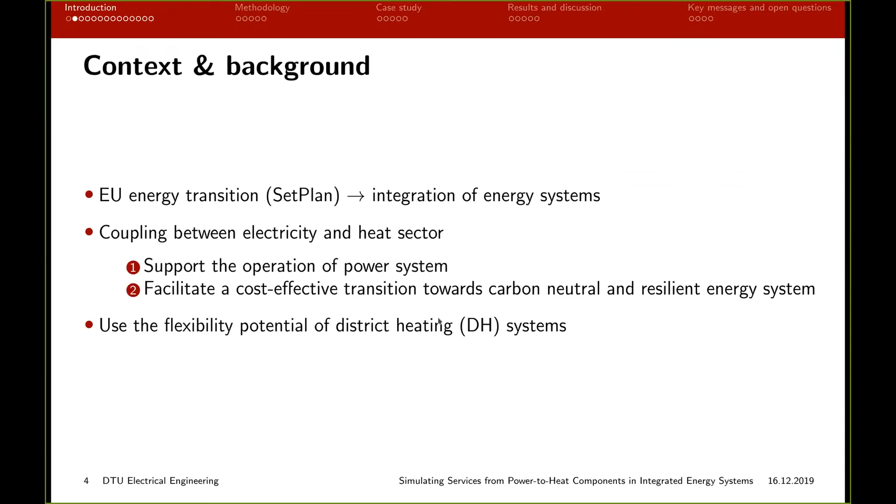So traditional power systems have been very centralized, vertically integrated, very few actors, and as we all know, they are evolving to complex structures. So in Denmark, in the context of this study, for instance, we have a strong penetration of wind power in the power system, large-scale PV, many actors coming into play, like several DSOs, and also proliferation of distributed energy resources that are also calling for new actors such as aggregators.

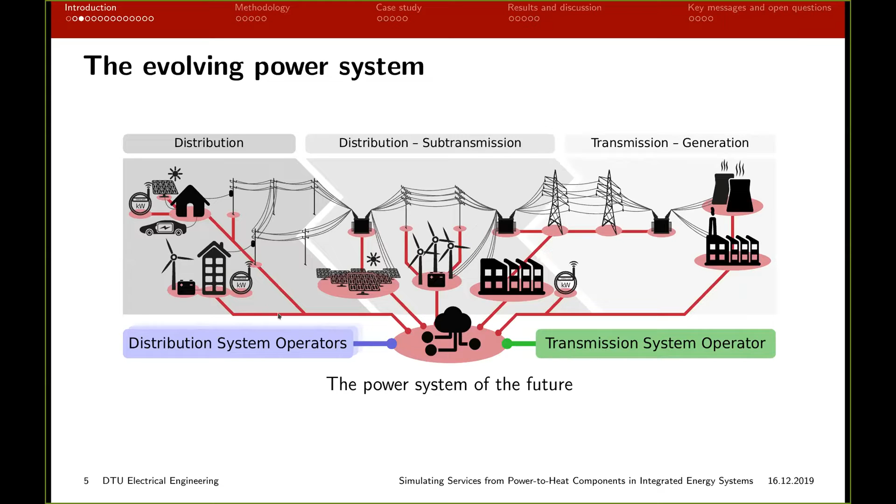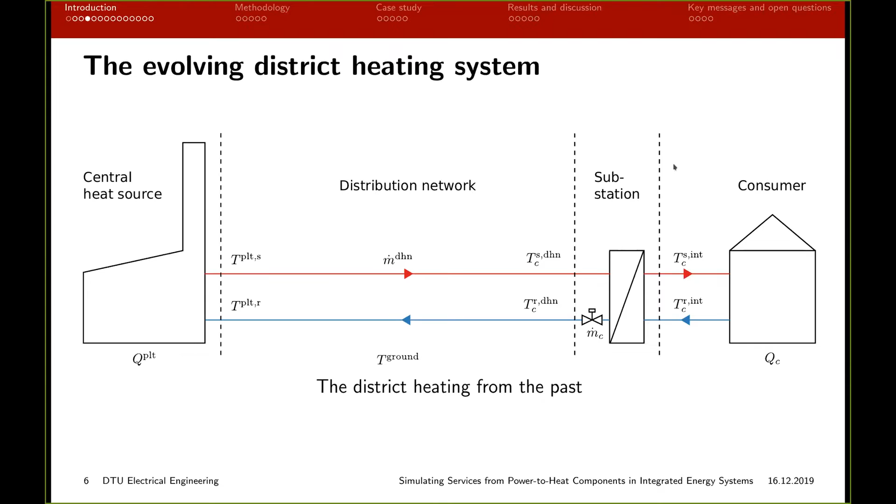On the other hand, we have district heating systems which have been traditionally operated with a central heat source that is delivering heat to end consumers via a network of distribution pipes carrying hot water to substations where the heat is exchanged to the consumers. And these systems have evolved through several generations. So from the first generation based on steam with very high operating temperatures above 200 degrees, to the second generation where pressurized hot water systems came into play, which drastically decreased the temperatures.

Still, the energy mix was very singular with only CHPs. And now Denmark is at a well-established third generation with temperature levels below 100 degrees, a fairly diversified energy mix with large-scale solar coming into play, and CHP, biomass. And there is a strong evolution towards the so-called fourth generation.

Thibaut, sorry to interrupt you. Can you speak a little bit louder? Apparently, you're not being heard very well. If you could just speak a bit louder, that would be great. Thank you. Is it better now? Much better. Thank you. Okay, sorry.

Yeah, so these systems are evolving towards the so-called fourth generation district heating networks, where the energy mix is much more diversified, mainly through heat recovery from data centers or industrial processes, a strong focus on multi-timescale storage from seasonal to weekly to daily, and a strong coupling to the electrical grid with centralized heat pumps and decentralized heat pumps.

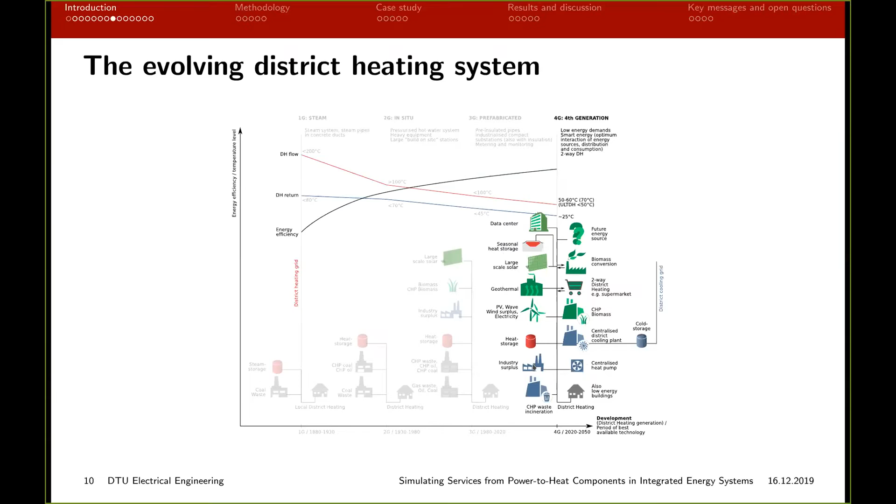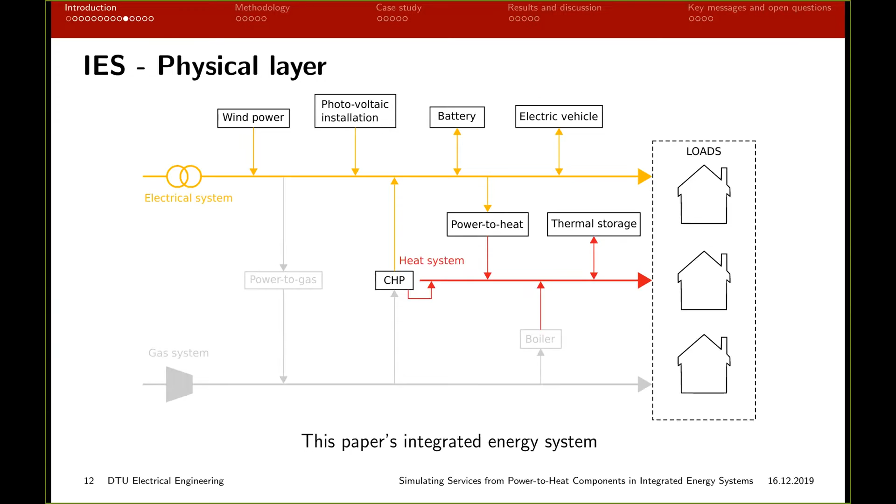So physically speaking, integrated energy systems look like this, and in this paper we focus on electrical and heat systems only, where both infrastructures deliver energy to the loads, and we have coupling technologies such as power to heat units that convert electricity into heat. These systems have actually undergone individual digitalization. So in the electrical system we see the well-known smart grid concept, and the equivalent of this heavy digitalization would be the 4GDH in district heating.

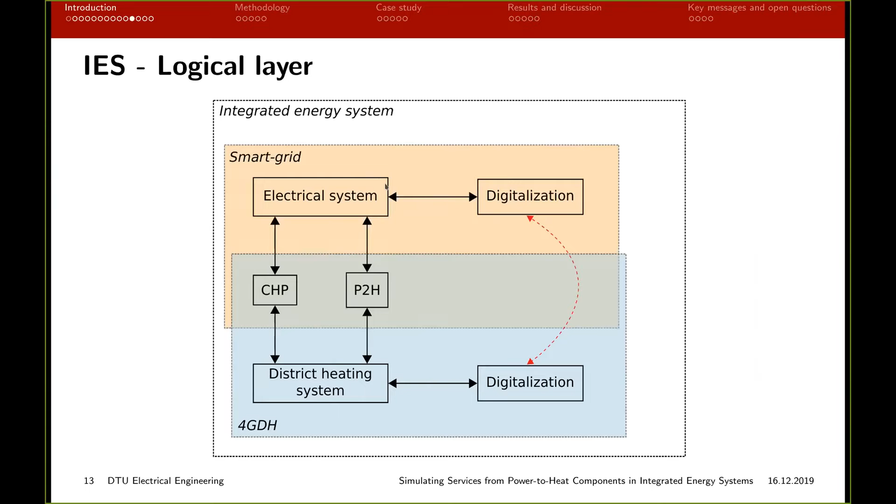And taken together with the physical coupling, they represent the integrated energy system that we are talking about today. And what is special about these is that electrical systems are fast, so they have operational timescales in the order of seconds or below, and they are very geographically spread from transnational to national to very localized systems, and their control is usually complex with several layers and entities involved.

On the other hand, district heating systems are very different, so it's hot water flowing into pipes, so these systems are slow moving, with the operational timescale in the order of minutes to hours. They are localized, so there is no such thing as a transnational district heating network. And their control is fairly simple with few entities involved and few layers of control.

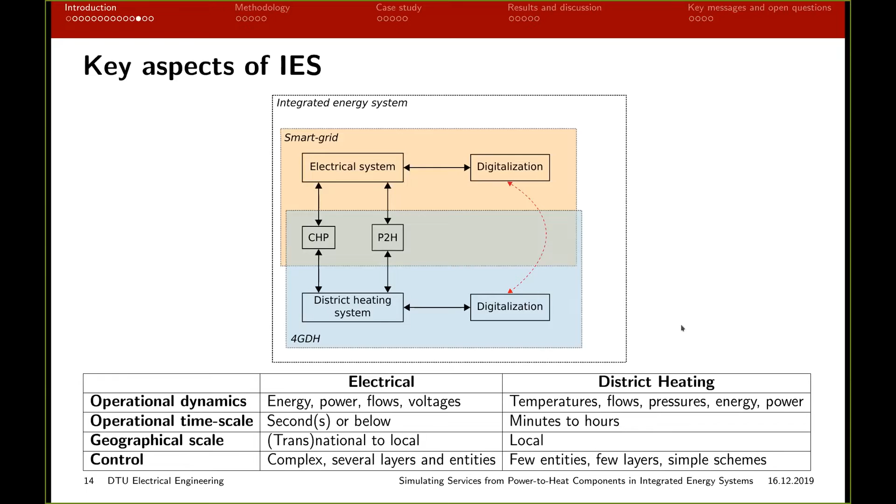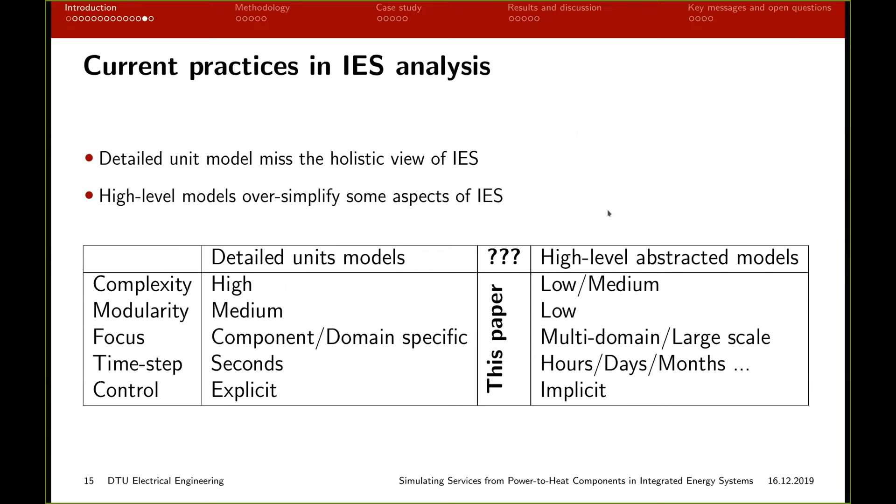So current practices in modeling these integrated energy systems are either focusing on a very detailed unit model that are highly complex and usually abstract to a very high degree the rest of the system in which the unit model is deployed, or very high-level abstracted models such as Balmorel or EnergyPLAN, which are low to medium complex and also abstract part of the system and oversimplify some of the system.

So with this paper, we actually tried to develop a complete tool chain for simulating integrated energy systems, and more specifically the dynamic operation of power-to-heat units in such context. We also tried to look at characterizing the effect of neglecting dynamic modeling of the thermal delays in district heating networks, and finally looked into the trade-off between computation time and simulation outcome accuracy within the dynamic simulation of district heating network.

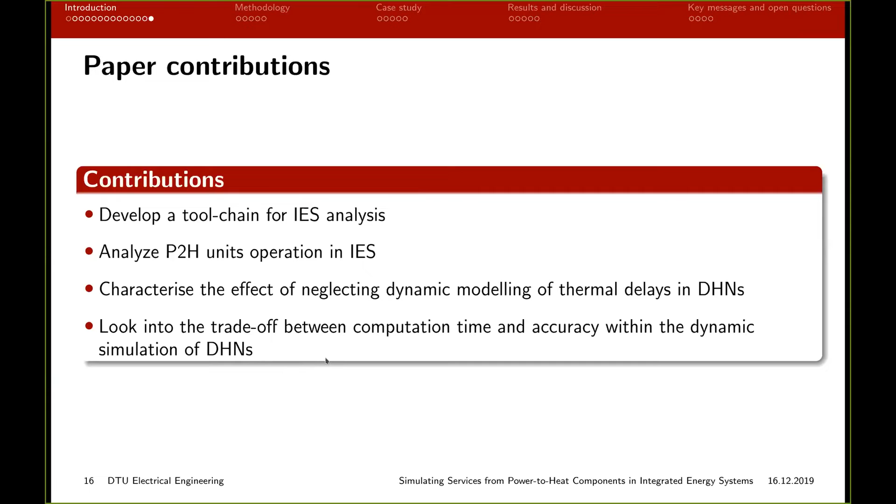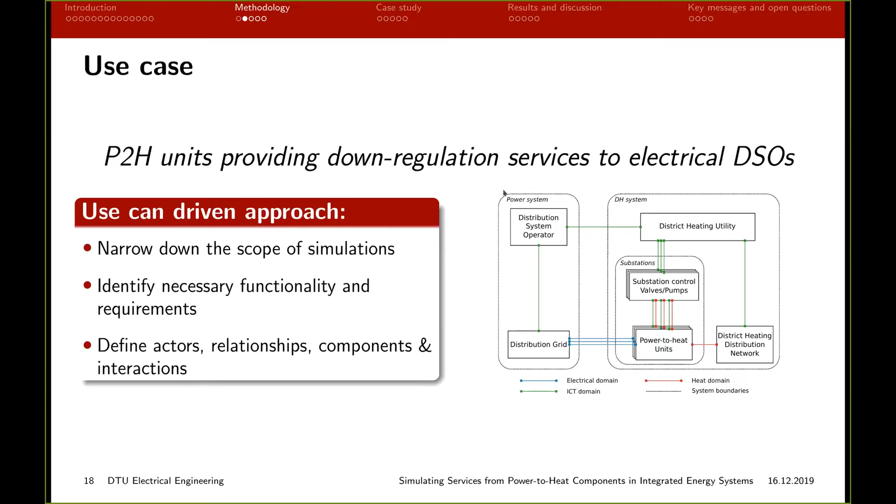So to do that, we actually developed a co-simulation toolchain using MOSAIK, which is a flexible smart grid co-simulation framework, which basically allows you to create an entire ecosystem of several simulators that are addressing a common problem and communicating and orchestrated together through MOSAIK. So we've built a power system simulator in Python using PandaPower. The control domain has been modeled explicitly in Python as well as the cross-domain units, so namely the power-to-heat units.

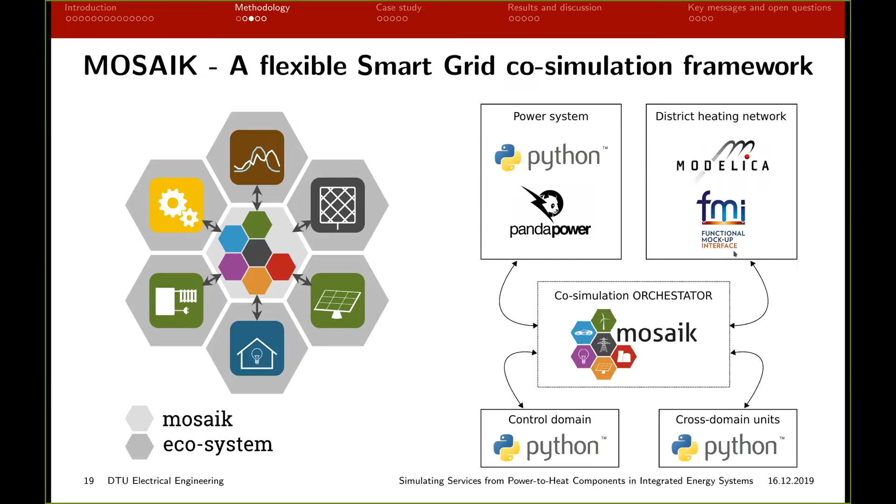District heating network model was programmed in Modelica, more specifically in the Dymola modeling environment, and interfaced with MOSAIK through the functional mockup interface. So basically, the district heating network model was packed together with its solver into an FMU, which is a functional mockup unit. And we have built a district heating interface wrapper around the FMI++ library in Python, which is basically a facilitator to interact with FMUs at simulation runtime in order to interface it with the MOSAIK scenario.

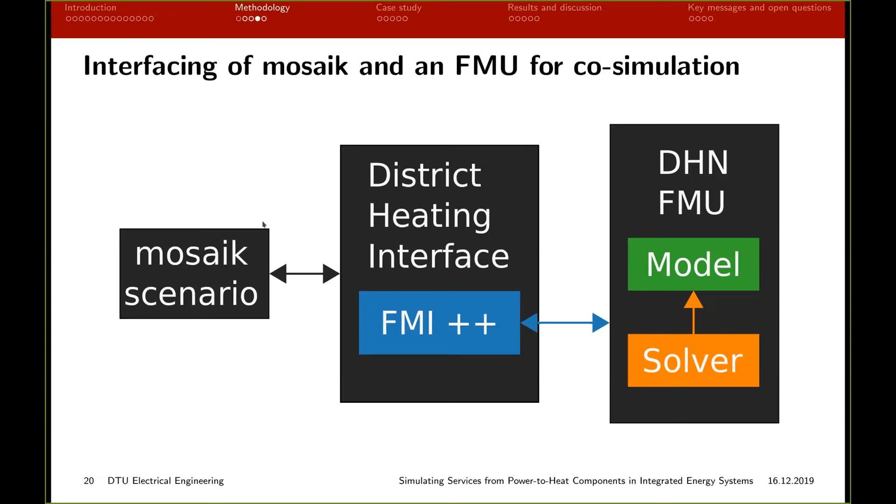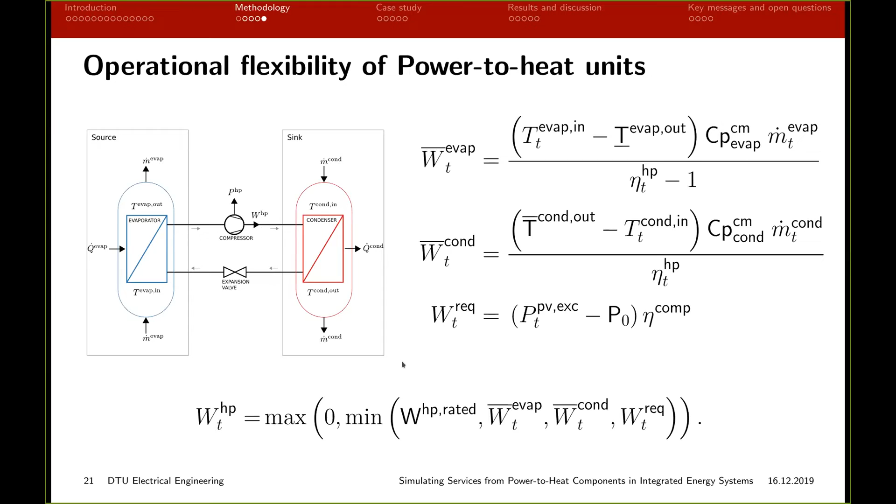The power-to-heat unit considered here is a heat pump, a single-stage vapor compression heat pump that has been custom-tuned to include some thermal constraints arising from the integration of the heat pump into a thermal system. And these constraints are to bound the work that can be provided by the compressor of the heat pump. So there is a lower temperature limit at the cold side, the evaporator, because you don't want to freeze the water that you're cooling down, and an upper temperature limit on the hot side, namely the condenser, because you don't want to start boiling the water that you're heating up. And the work that the heat pump can then provide is bound by these thermal limits, as well as the rated work of the compressor.

So our use case has been applied to an existing case study using our co-simulation toolchain in Nordhavn. It's a district in Copenhagen, Denmark. This area features both an electrical and district heating network, and we've performed low temperature district heating simulations with supply around 65 degrees, return 35 degrees, using the real topological and time series data that have been provided by the respective local DSOs for a simulation horizon of 24 hours.

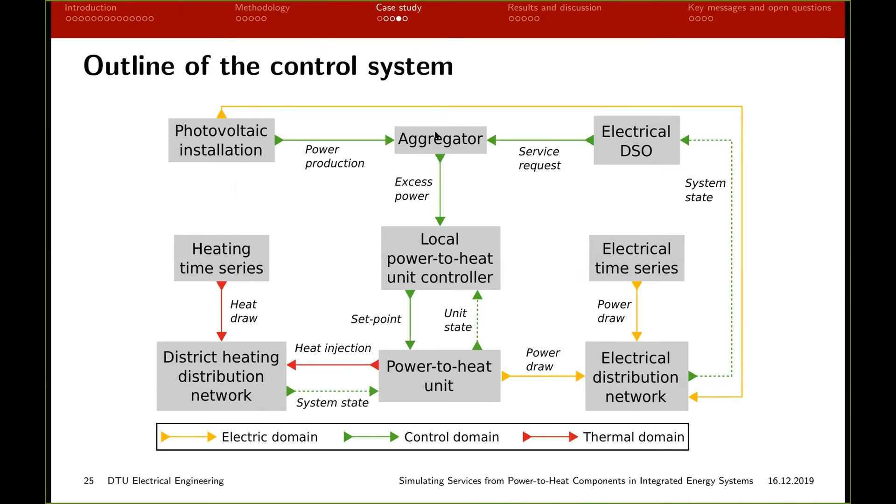Several simulation scenarios have been considered. So a base case with no heat pump using all the real heat demand signal, and same for the electrical side. A step activation of the heat pump to isolate its effect using some flat heat demands, and a peak shaving scenario where the heat pump was requested to convert some excess electricity into heat.

We've also compared dynamic versus quasi-static district heating network simulation, performing also a sensitivity analysis on the co-simulation time step. So this is basically the simulation time step at which the orchestrator, MOSAIK, is interacting with the different simulators to exchange data among themselves. And this has been done for a 143 kilowatt electrical heat pump.

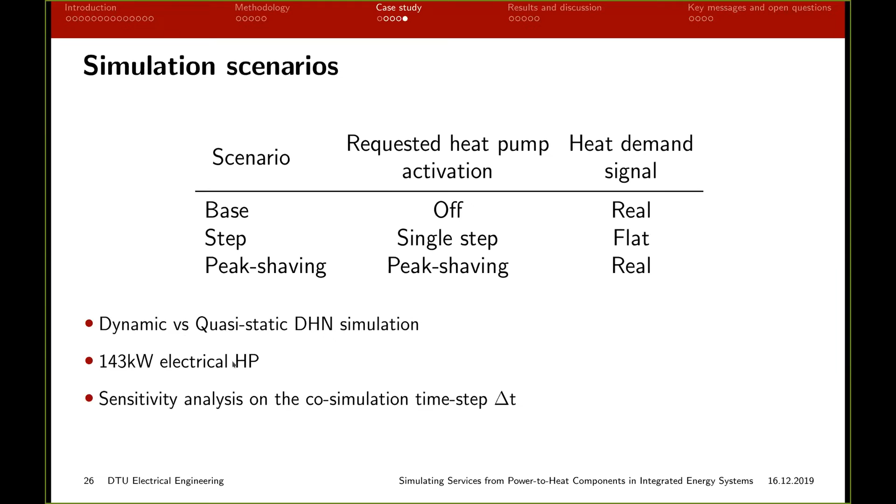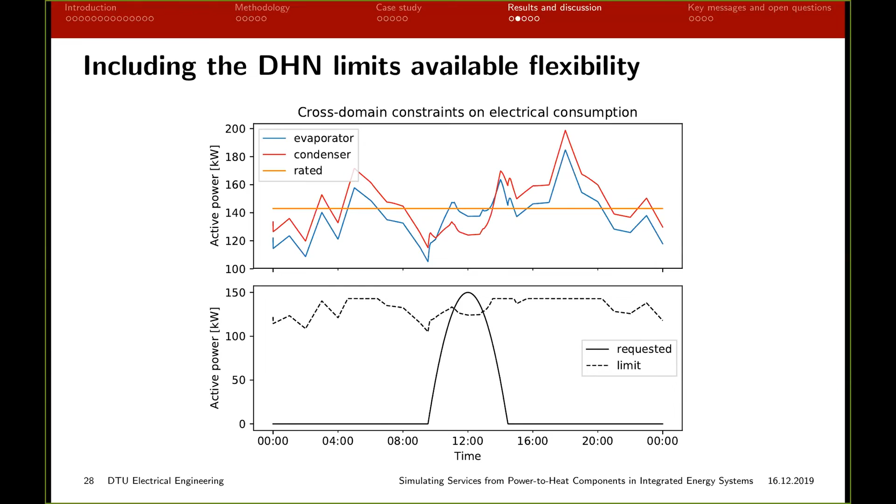Second comparison here: we've shown that the maximum electrical consumption of the heat pump varies over time, and to isolate that effect, we checked on a step activation of the heat pump and constant operation in the district heating network. We can see that at a step activation at noon, there is a spike in the thermal constraints that gradually decrease in steps after 20 minutes. These are the solid lines. This is under a dynamic simulation, and under a quasi-static simulation, we see that there is actually no gradual decrease. So we don't capture these dynamics occurring after the step change.

And to understand these gradual effects, we have to look at what's happening at the heat pump level. We can see that after the step activation, there is also a transient in the heat that is absorbed at the evaporator and released at the condenser, as well as in the COP, that is decreasing. That is because as the heat pump starts operating, it is working over a larger delta T because the return water is being cooled down and the forward water is being heated up.

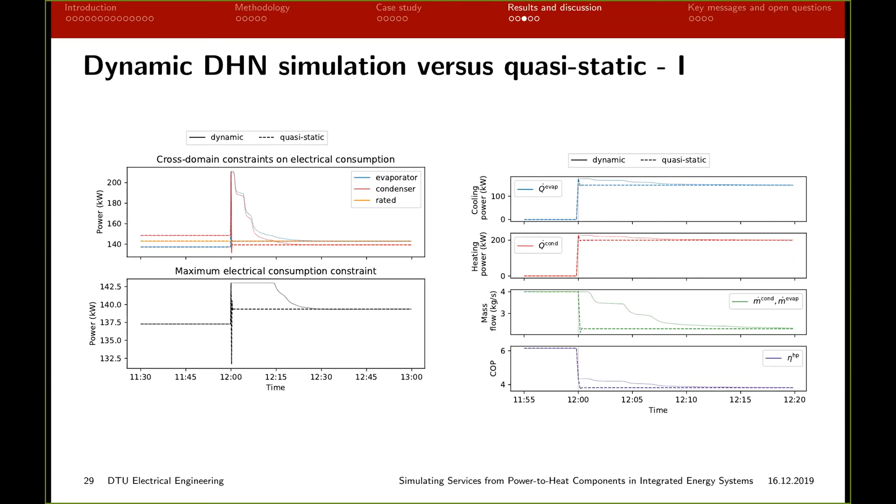But we can also see that there is an effect on the mass flow that the heat pump is undergoing in the district heating. So that means that the heat pump activation actually affects the mass flow in the district heating network. And to understand that, we have to look at what is happening in the district heating network.

So here is an overview of the district heating network consumers that are hydraulically located downstream of the heat pump. We can see that after the step activation, the consumers that are closest to the heat pump see hot water coming in first. And as the hot water is reaching them, they start to close their valve to meet the desired constant return temperature that they are asked to deliver back into the system.

And actually these steps are each of the consumers that is seeing the increased temperature resulting from the step activation of the heat pump. So they close their valve one after the other, which explains the different steps that are propagated upstream at the heat pump level. And again, under a quasi-static simulation, these steps are actually not properly perceived by the simulation.

So this is actually important because a quasi-static simulation doesn't capture the delays and transients that are induced by the travel time of water, and therefore the dynamics and heat pump flexibility cannot be properly evaluated.

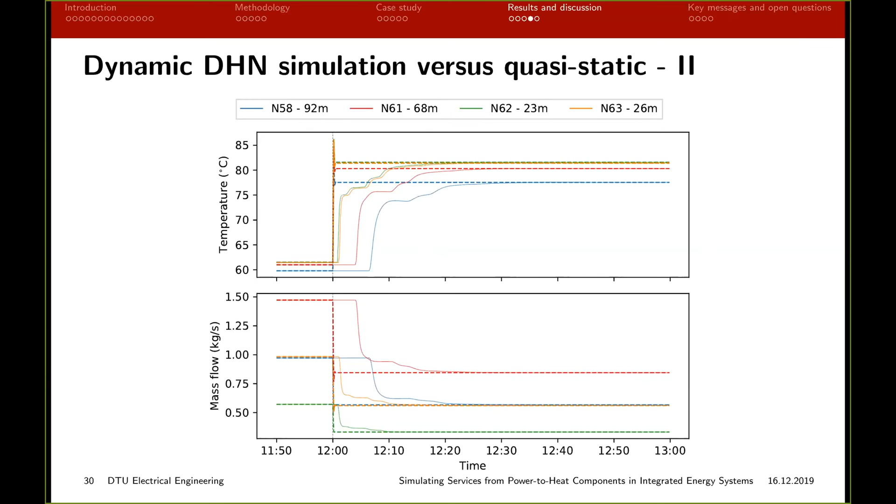Finally, we looked into some computational accuracy and trade-off. So here, the first trade-off is between the dynamic and quasi-static simulation. So we can see a quasi-static simulation always introduces some error, both for the critical node supply temperature in the district heating network, and also an electrical dynamic, which is the maximum power limit for the heat pump. On the other hand, a dynamic simulation actually is very accurate up to 120 seconds, so 2 minutes time steps. And after that, the error increases largely to reach over 15% for a simulation time step of 0.5 hours, for instance.

Then the idea was to check whether there was an actual trade-off for the co-simulation time step within the dynamic simulation. And here is a sensitivity analysis for different co-simulation time steps: 1 hour, 15 minutes, 10 minutes, 5 minutes, and 10 seconds, which we consider to be the most accurate and the absolute truth. And you can see here there seems to be a Pareto front at delta t of 5 minutes, where the error and computation time stay reasonably low.

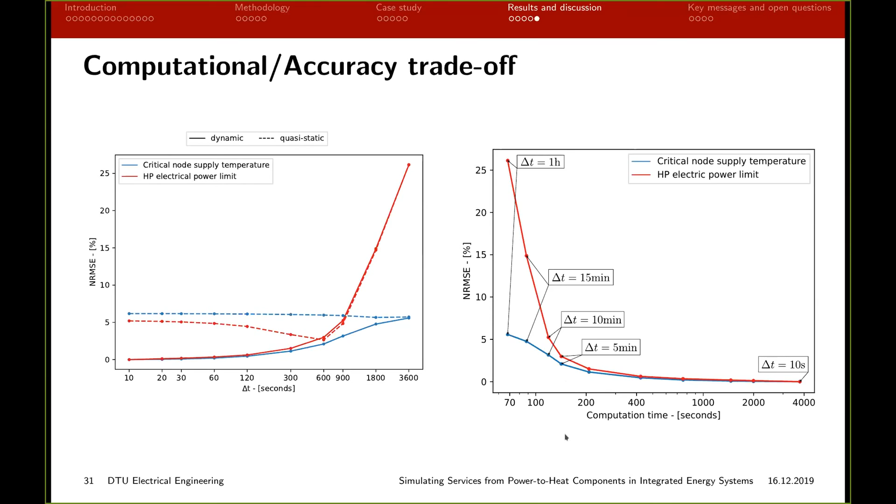So in conclusion, we actually managed to develop a generic toolchain for integrated energy system simulation using co-simulation. We showed that thermal constraints propagate into the electrical domain, and that heat pumps cannot always convert all excess electricity into heat. And that is because you need a dynamic simulation of the district heating network to actually capture the true flexibility potential of these units. We also showed that a simulation time step of 5 minutes for the district heating network could be sufficient, but should be tuned according to the accuracy and needs of the simulation.

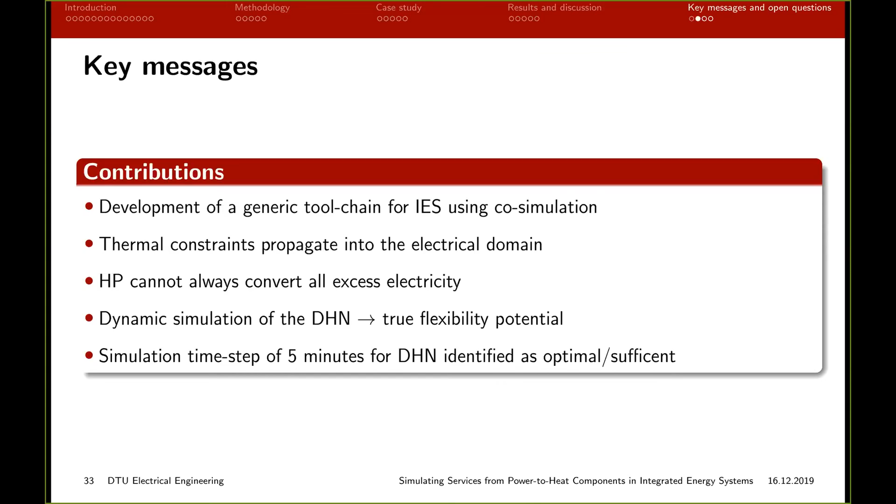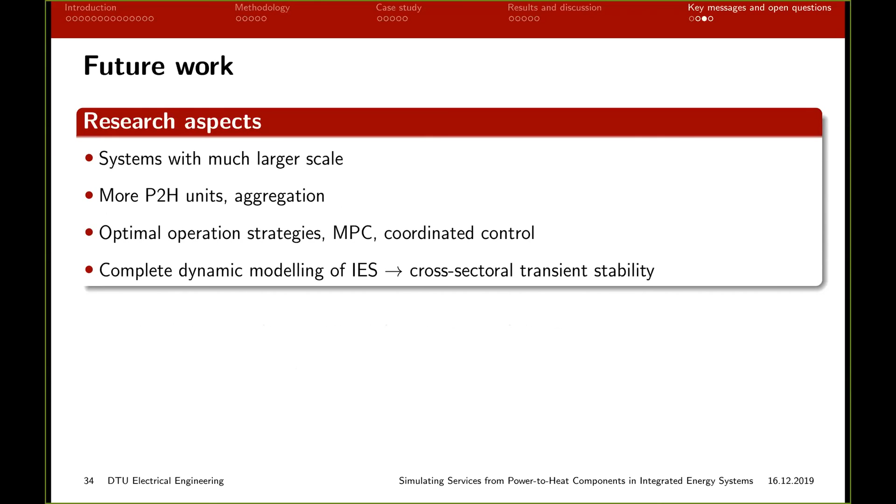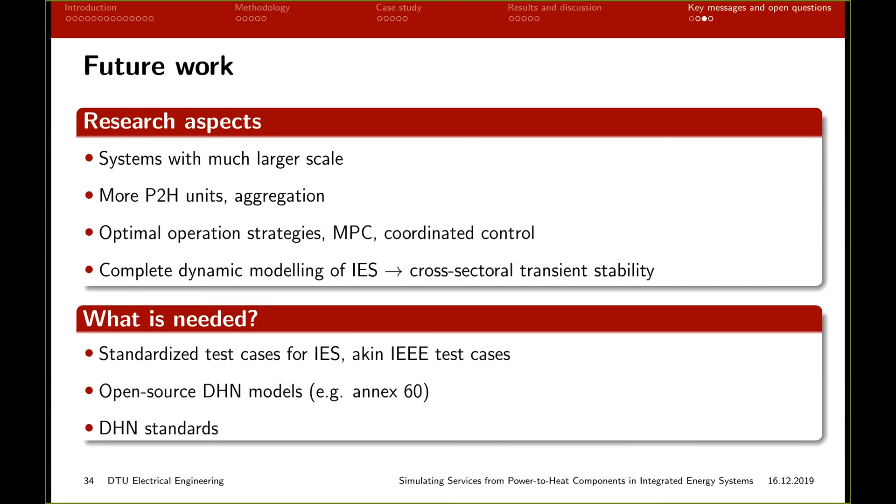Some future work: systems with much larger scale, since this system is fairly small; more power-to-heat units to look into aggregation; and also some optimal operational strategies and more complex controls such as MPC or coordinated control between both systems, and a complete dynamic modeling of the integrated energy system. What is still needed is some standardized test cases for integrated energy systems, such as the IEEE test cases, and open source district heating network models and district heating standards.